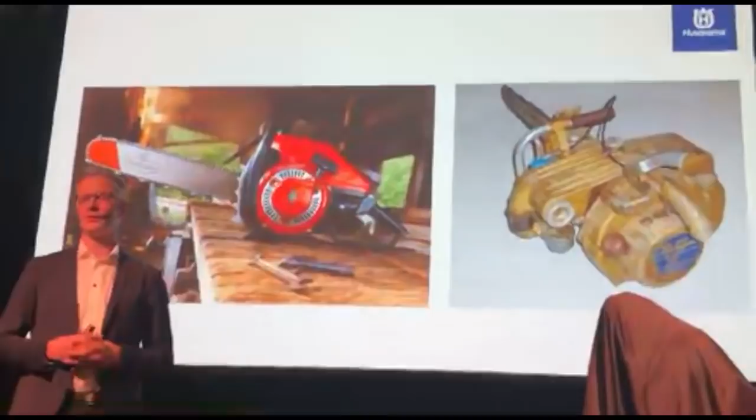60 years of chainsaws and innovation leadership we mentioned, and of course it started here. 1959, we saw this, what's called a Husqvarna 90 model. It was really a bit of a skunk works, building on the two-stroke engine expertise we had in the company back then, but trying that in other applications. That in itself is something that has shaped Husqvarna over the years, to adapt and transform depending on trends and shifts in the industry, not only our industry at that time, but other industries as well, like robotic mowers. Comparing to what was mainly available in the market for the professional user, this was a true innovation, user-friendly chainsaw that you could actually carry in a good way by yourself. So that was the first start.

Moving ahead 10 years to 1969, this is the Husqvarna 180. The main benefit with this was addressing something our users had suffered from: vibrations and white fingers. What we introduced here was the two-mass principle, where we separated the handles from the actual engine piece, the vibrating part of the product, meaning the vibrations when you hold the product are reduced by a big magnitude. So that really improved the working climate and environment for our customers.

Next step, another 10 years. We're moving into... this is the Husqvarna 162, where we introduced electronic ignition systems. Those were mechanical before, but we also introduced inertia-initiated chain brakes, which was a safety feature because it's a dangerous tool, we all know that. So we worked quite a lot with safety features in the past, and going forward we will continue to do that. The chain brake, an instant stop when something happens or you get a kickback, is truly important.

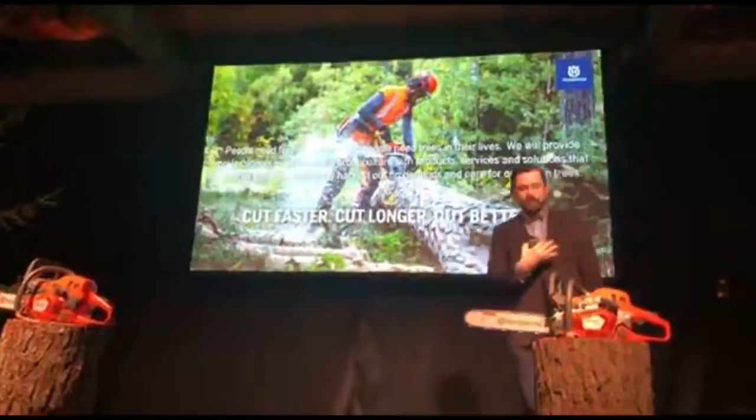This is my own personal team forestry statement. Our forestry group inside Husqvarna have this as kind of the mantra that we live by. People need forest products and people need trees in their lives. We will provide professionals in forestry and arboriculture with products, services, and solutions that enable them to responsibly harvest our timberlands and care for our urban trees.

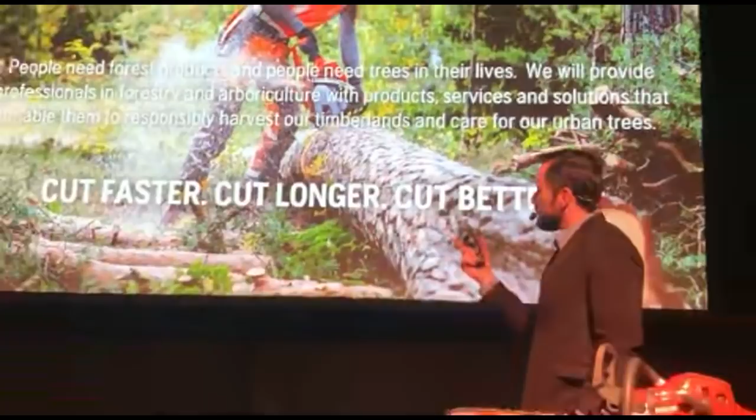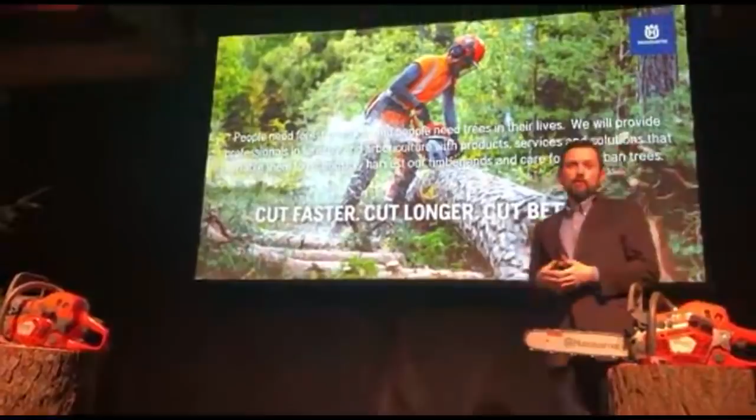So therefore, we will give our customers what they need to cut faster. We will develop products that will make them more productive, put more money in their pockets. They will cut faster. We will give them the ability to cut longer. We will enhance our durability any way we can to make sure that they can rely on our products. Our products are durable. Our customers can rely on us. And our customers will cut better. We will have products that will give them the height of efficiency.

We understand what their needs are, that these saws will be used not only for felling trees, but for bucking and limbing and trimming and pruning and climbing and groundwork. They have to be able to operate in all kinds of conditions. And so we'll talk about that in a moment too. But this is what we live by at Husqvarna Forestry. And I'm proud of my team, and I'm proud of what we have developed here for you today.

But when we're actually developing and getting into the what now of everything, we have to also dive a little deeper into what are the specific needs of those customers, the urban forester, the harvest forester, and even the landowner. The landowner is another important part. This is the farmer, the timber harvester, the timber landowner, the person that's investing in the property, that's maintaining a forest for 30 to 80 years, depending on what part of the world they're in. They're important too. So what are their specific needs?

And as we travel around and we meet these customers and we work side by side with them, what we've understood is that there's really three sides of this. There's the endurance side. Those customers have to endure. They have to endure some pretty tough environments, and their products are expected to do the same thing. So on the chainsaw side, we have to be durable. That's the baseline. That's why it's the bottom of my triangle there. That's the foundation. We have to be durable.

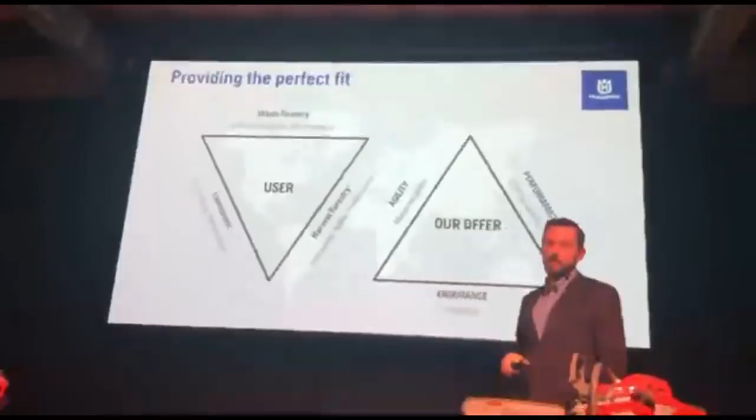We have to be agile, and that means that we have to be the best when it comes to maneuverability. When it comes to being able to limb, to buck, to climb, to work on the ground, that saw has to be very maneuverable. And then there's performance. This is just about getting the job done as fast as possible, putting money in the professional's pocket, or getting them back home to their families earlier. Whatever drives them, drives us. But performance is key to our operators.

So if we put all that together, durable product for endurance, high maneuverable product for agility, and high performance product. And how we're going to quantify that, we're going to talk a lot about this, is cutting capacity. That's our measure. That's the standard that we will measure ourselves by to make sure that we are giving our customers what they need. And we're going to talk more about that in a moment.

We get out with the customers, and we also understand that it's not just another tool. These chainsaws that you see here are not just another hammer. I know people that name their chainsaws. I don't know anybody that has named their hammer. These are very close to the arborist, very close to the forestry worker. That's why we actually call them forestry experts internally. They are experts, and this is an extension of them. So it's got to be a precision piece of equipment they can rely on.

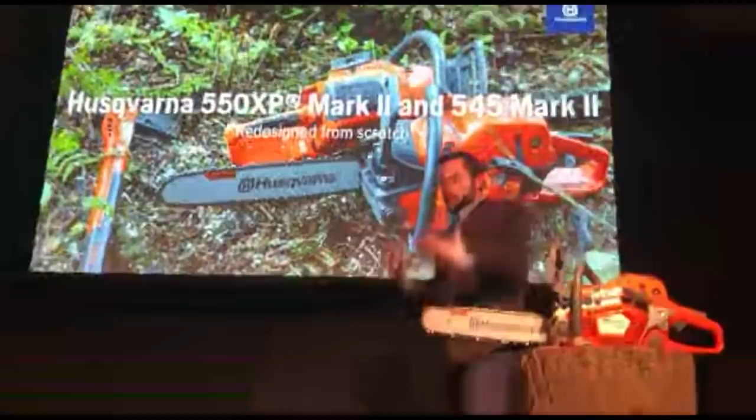So that's the basics of where we've come from, why we've done what we've done, and we're going to dig a little deeper into this. The 545, it's the baseline product. It's for the customer that is looking for a little bit better value side, is comfortable with performance that is on par with what the industry standards are. That's the 545.

But if you want to take a step up, if you want to go further than what the industry has typically offered, if you want the highest levels of performance in the industry, if you want the best-in-class cutting capacity, period, the 550 XP Mark II is a chainsaw for you. That's the difference in these. That's what we set out to do, and that's what we've done.

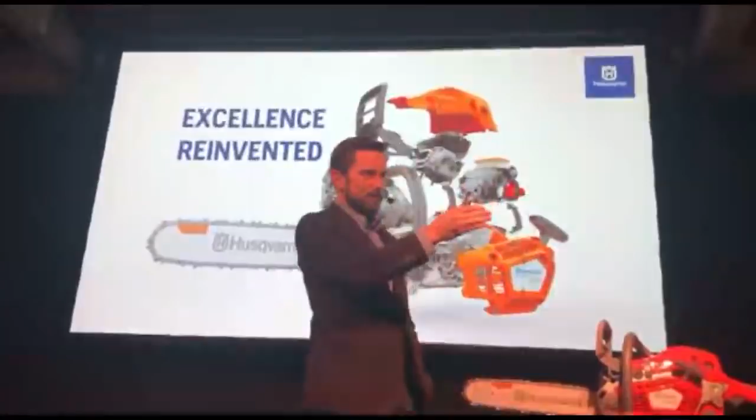This is a ground-up redesign. We are an excellent company, we have excellent products, but this is excellence reinvented. This is from the bottom to the top, left to right, a new product. And to tell us more about that, because I'm just kind of the dreamer of all of this, the actual doer is this guy over here. This is Anders Persmeen, and he's going to take you through what we've done in a better way. Anders.

Of course, I haven't done this design by myself. I have a great team behind me. However, my role within this project has been to lead the technical development and engineering of these Mark II models. I will hereby go through some of the improvements that we have made on the Mark II compared to the previous iteration. The focus areas we have had from the technical point of view are the endurance, the performance, and the maneuverability.

So we mentioned a lot before about the whys and the triangle: the endurance, the durability, the agility, the maneuverability, the performance, and cutting capacity. But if we're going to start with endurance, just to dig in a little deeper, we've done a lot of work with our harvest foresters, our production foresters. From 3 o'clock in the morning when a lot of them get up to go to work every day, with their families relying on them to produce, every board foot, as we would say in the U.S., every meter of wood that's cut is money in their pockets. So these people that do this hard work expect a saw to keep up with them.

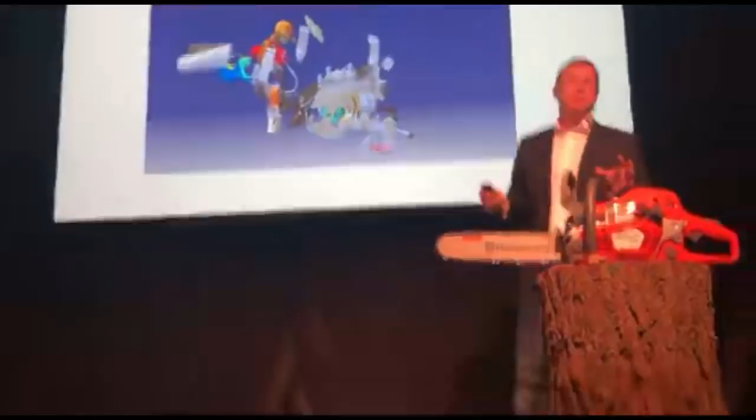For Mark II, all vital parts are new. In order to get the great endurance, performance, and maneuverability, we decided to redesign the Mark II from scratch. Of course, we have used some standard components and fastening elements that we share with other platforms. What you see here on the screen are the components that we have reused from the previous model.

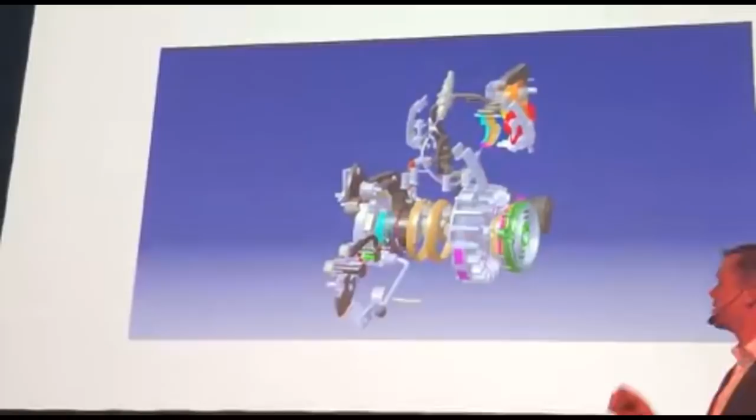We started to design the Mark II in the center of the product. We have a new crankshaft, a new oil pump. The clutch cover and parts of that are also new. We have, of course, the new piston, the cylinder. We also have a complete new intake system.

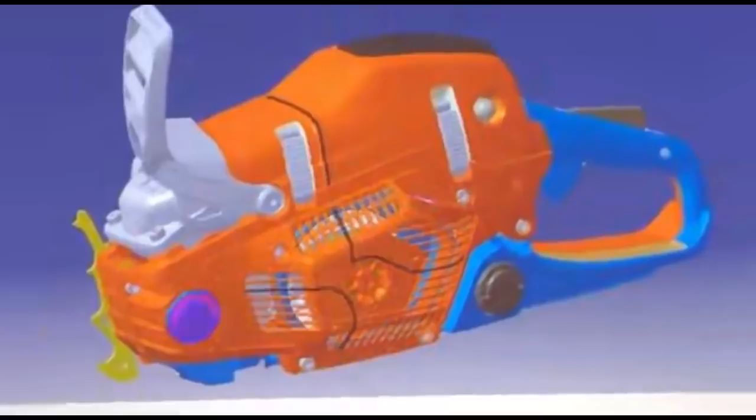The crankcase and the fuel tanks are also new, and of course the muffler. Surrounding parts around the engine have also been redesigned. And of course we have worked with the starter housing to get even better cooling performance. So this is just one way to demonstrate that these 2 models are designed from scratch.

What you see here to the right is the airflow that goes through the product. This airflow is important for cooling the engine, but it's also important for the engine function, the performance of the engine. Particles that come into the engine will cause wear on engine components, and this wear can result in reduced power output. It can also result in reduced life of the piston, the cylinder, and the bearings. In worst case, it can lead to seizures.

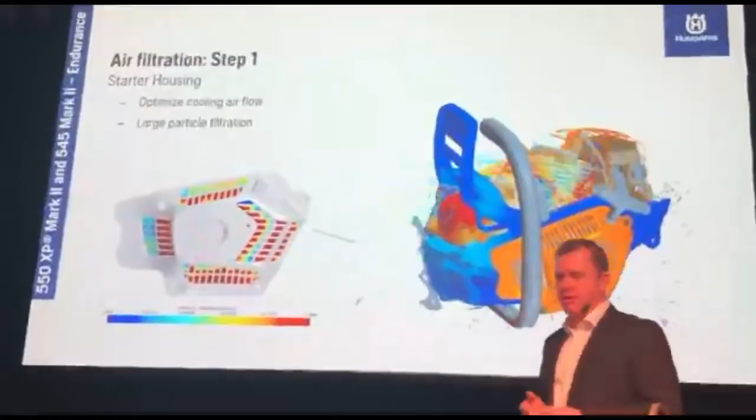What we have done here is to improve this. When it comes to air filtration, in my point of view, it's not just an air filter. Air filtration is much more complex than that. For Mark II, we have improved the air filtration in 3 steps. The first step starts with the large particles, the big wooden chips.

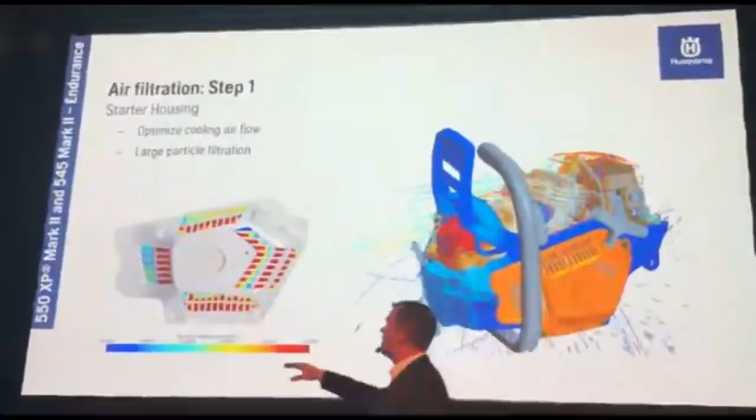We have redesigned the starter housing and the openings of this starter housing. We have two benefits of this. We have increased the total cooling airflow, but we have also been able to manage the wooden chips so they do not come into the starter housing too much.

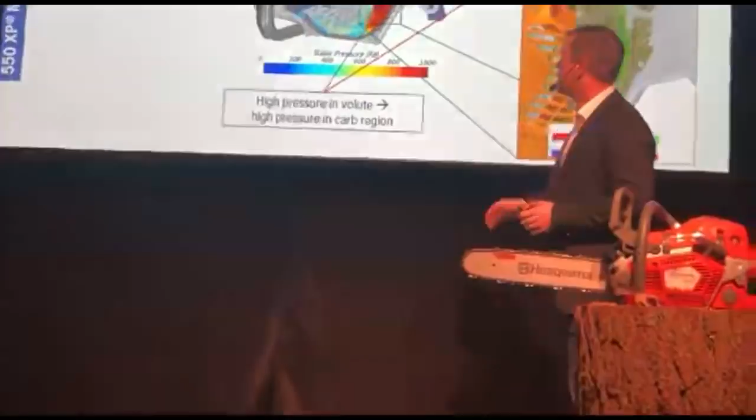The second step of air filtration handles medium and small particles. This is done via the air injection system. We have reworked the fan and the air nozzle in order to improve the centrifugal purification of air that will be led into the filter area. We have also been able to increase the pressure in the volute.

Higher pressure in the volute will result in a higher pressure in the carburetor region. Higher pressure in the carburetor region will result in less dirt for the air filter to filter.

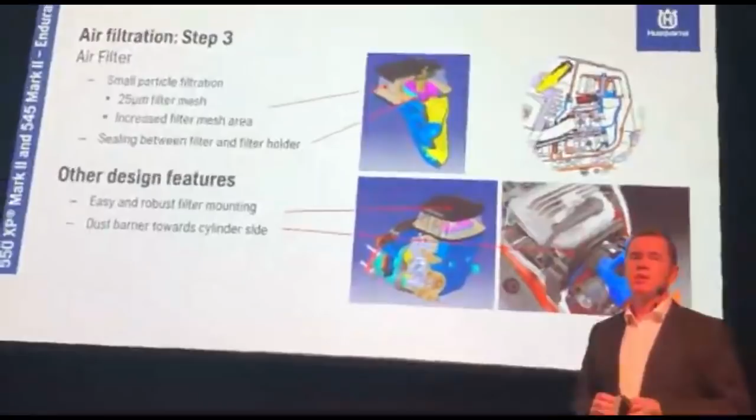The third step in air filtration handles the very small particles. In this case, we have a completely new air filter system. The filter mesh consists of 25 micron openings. These are very, very small openings. To compensate for this, we have been able to increase the total filter area.

We have also integrated a rubber sealing between the filter and the filter holder. This will make sure that the air for the engine must go through the air filter mesh and not take any shortcuts that will result in particles damaging the engine components.

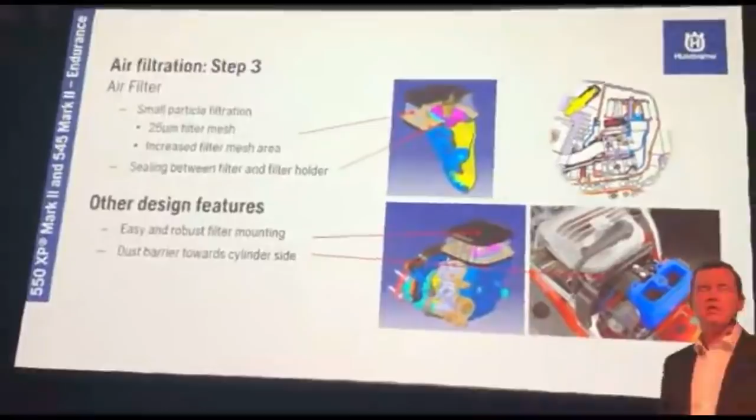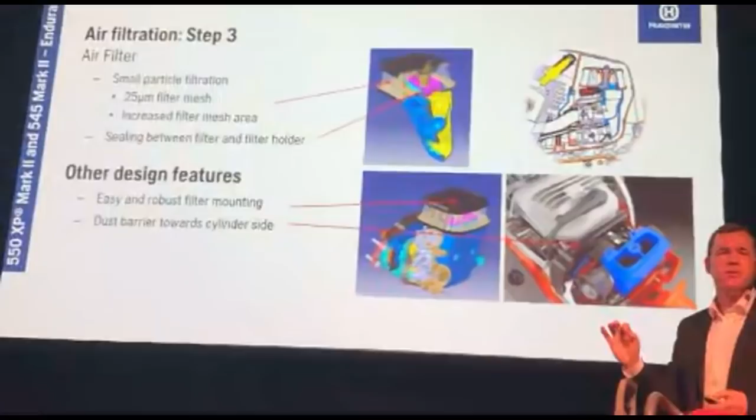We also have other features. We have an easy and robust filter mounting. We have also implemented a dust barrier. On the cylinder side, you will have a high pressure and high airflow containing dust and dirt. And that's not something we would like to have in the filter area. This dust barrier is very well supported by the cylinder cover, making sure it's sealed.

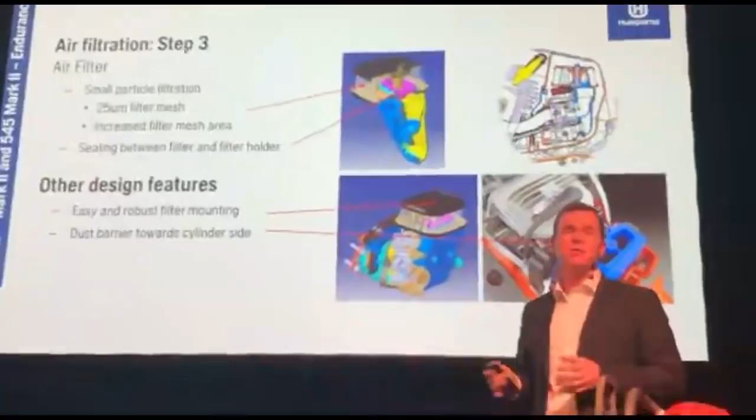By having all these three improvements of air filtration, we've been able to increase the time before you need to clean or replace the air filter. And we also improved the resistance of these Mark II engines to getting dirt into them, causing these failures I mentioned earlier.

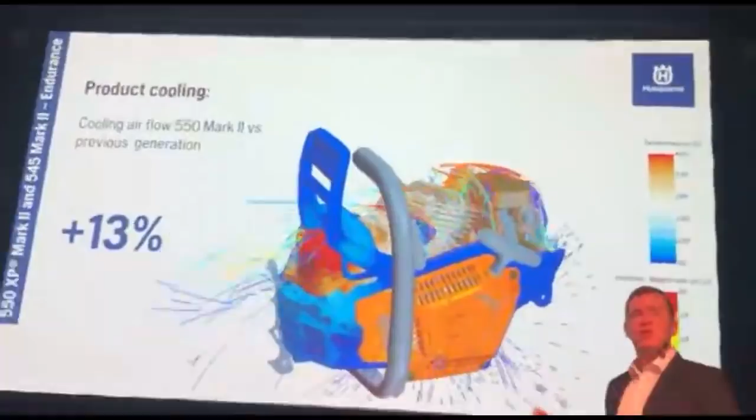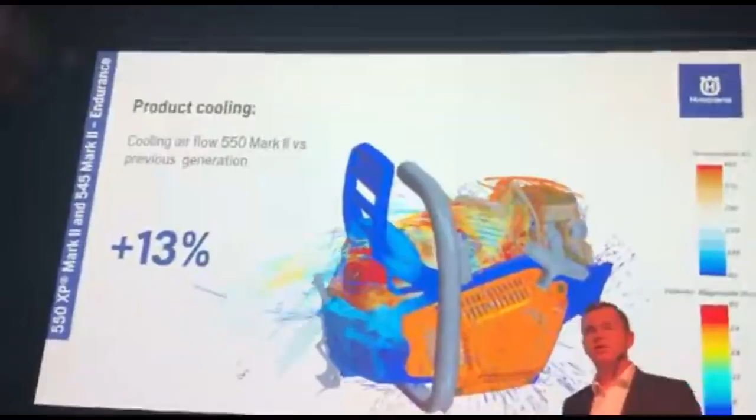When we talked about the redesign of the starter housing, how important that was for the cooling, we've increased the total cooling airflow by 13%. This will reduce the temperature of the engine, but also the product. So why is that important? Reduced temperature will make the product more durable. It will also increase the starting performance and runnability of the chainsaw.

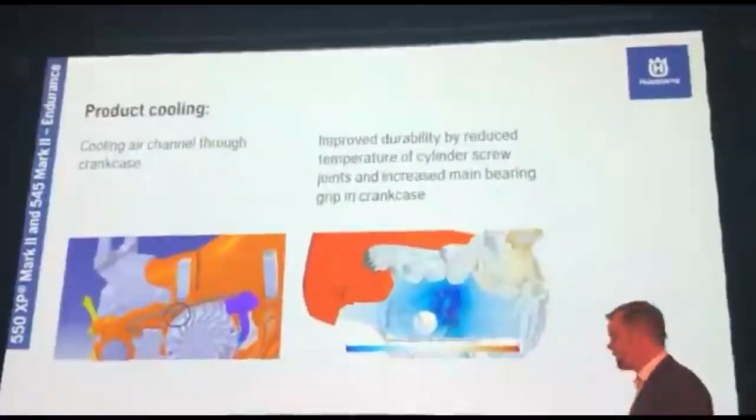One example of how we have utilized some of the increased airflow is to transfer some of this airflow through a channel in the crankcase to the clutch side of the crankcase. By doing this, we've been able to reduce the temperatures in the crankcase and thereby also improve the screw joints between the cylinder and the crankcase. Also, the main bearing and the installation of the main bearing have benefited from this.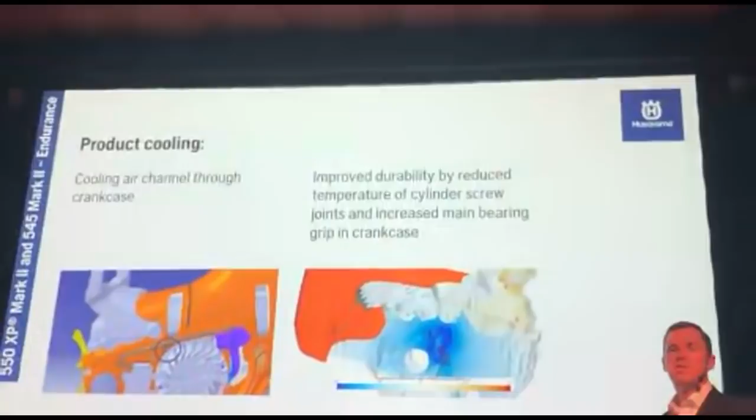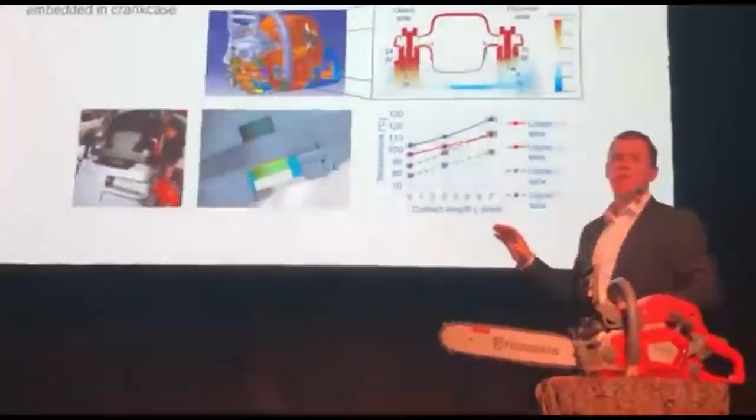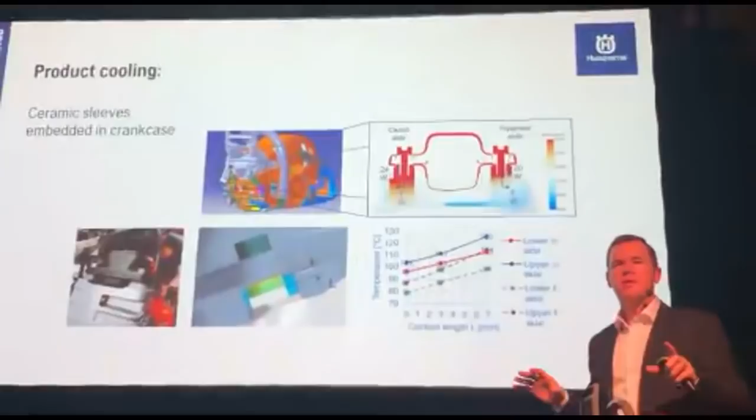Another example of how we have been working with product temperatures is the ceramic sleeve, placed between the muffler and the crankcase. We know that the muffler is very hot, and most of the heat transfer goes through the contact area between the muffler and the crankcase, not through the screw. This ceramic sleeve has very good insulation, and through theoretical models we have been able to design this interface so that we are at a thermal level we consider proper for a real good screw joint.

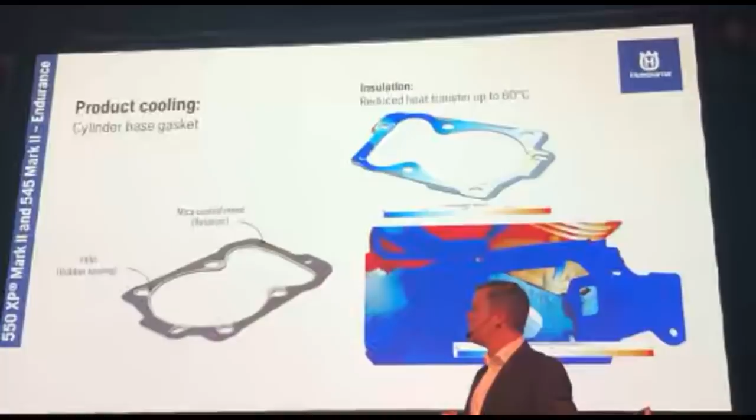We have also redesigned the cylinder-base gasket, all to reduce the heat transfer from the cylinder to the crankcase. We have added mica, a silicate mineral with very good insulation, and by doing that we have reduced the heat in the crankcase by up to 60 degrees.

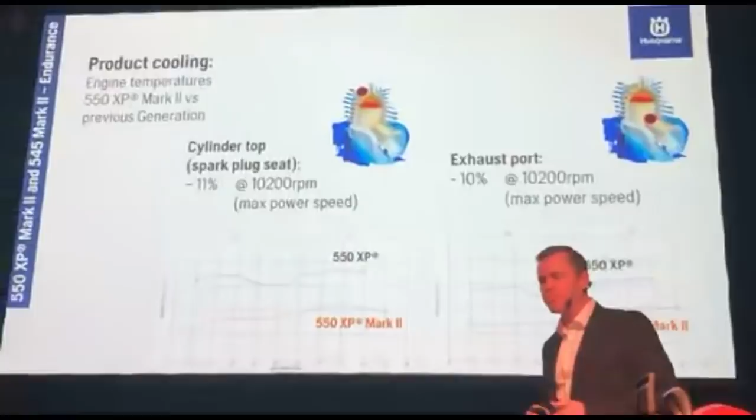In Mark II, even though we have increased the power output, we decided we wanted to reduce the thermal level of the engine, the thermal load of the engine. In this case, we have reduced the cylinder temperatures at rated speed by about 10%. This will reduce the stress level of the engine components, and it will also give you thermal margins for overheating.

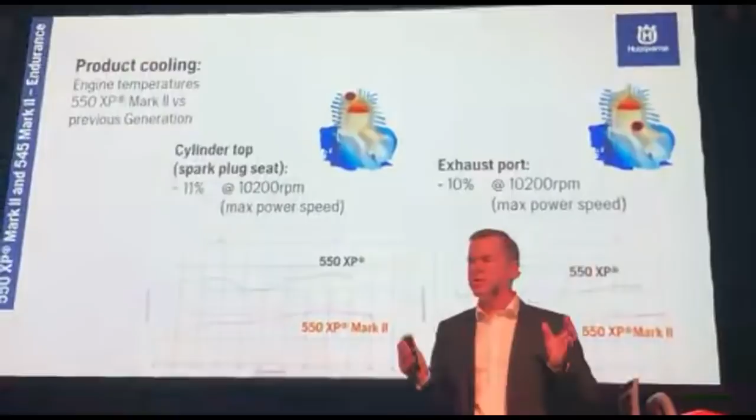So, all in all, when it comes to product cooling, I would say that the Mark II models have very good margins for operating in tough and hot environments.

Endurance is not all about product cooling. Endurance is also about adding stronger and better material in areas where we have high loads and tensions. For the handlebar, we decided that we wanted to have all force-loaded parts in metal, including the spring holder. This is a difference compared to the previous model.

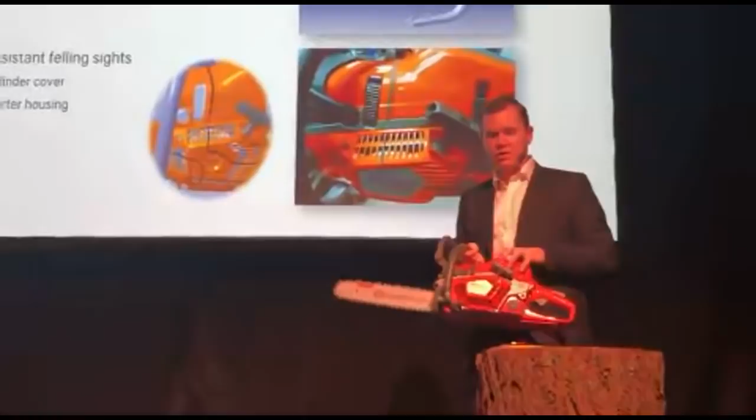When it comes to the felling sights, we decided that the cylinder cover and the starter housing should be dual injection molded. This will guarantee long-lasting wear resistance when using the product. You may see these as small changes on Mark II models, but when it comes to long-term durability, these improvements are huge.

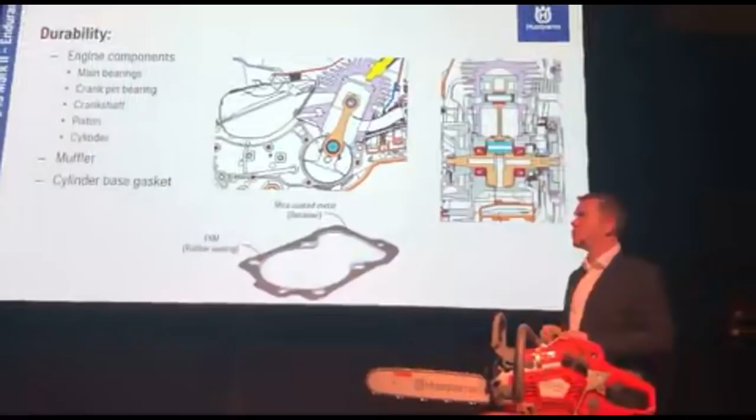We have also redesigned other components in this product for increased durability. The main bearings have a more solid installation in the crankcase. We have a new, stronger crank pin bearing that stands higher loads. The crankshaft, connecting rod, piston, and cylinder are also reinforced for increased durability and performance over a long time.

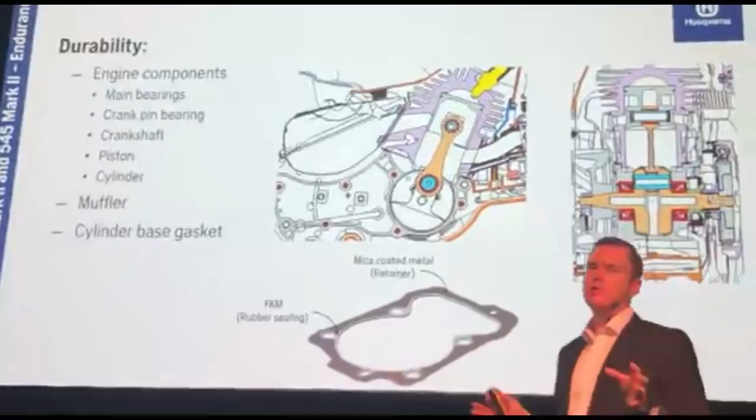The muffler has a larger volume compared to the previous model. This larger volume will make the engine breathe in a better way. This will give us higher power output, but it will also reduce the thermal load of the engine.

The cylinder-base gasket, as mentioned earlier, has this mica coating. We have also integrated a rubber sealing in this cylinder-base gasket. This will ensure there is no leakage between the cylinder and the crankcase. This is very good for durability, but also for starting performance and runnability.

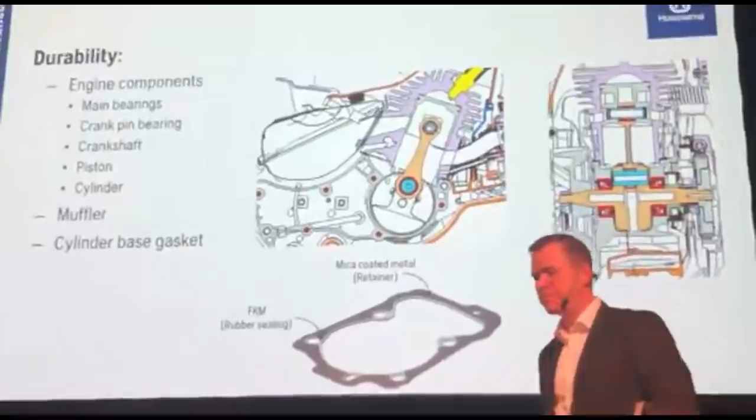When it comes to startability, the Mark II has been improved by the following steps. The reduced temperatures of the product will give us better control of the air fuel mixture in the crankcase.

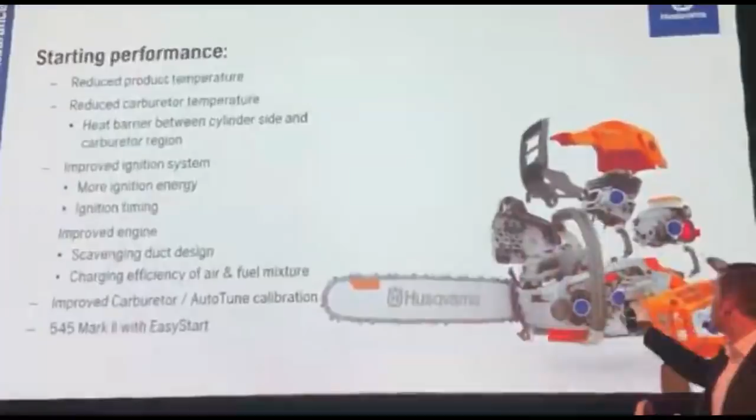The heat barrier between the cylinder and the carburetor will make sure you're reducing the temperature of the carburetor. This is extremely important, especially in hot environments. The reduced temperature will also reduce the risk of the fuel vaporizing earlier than it should.

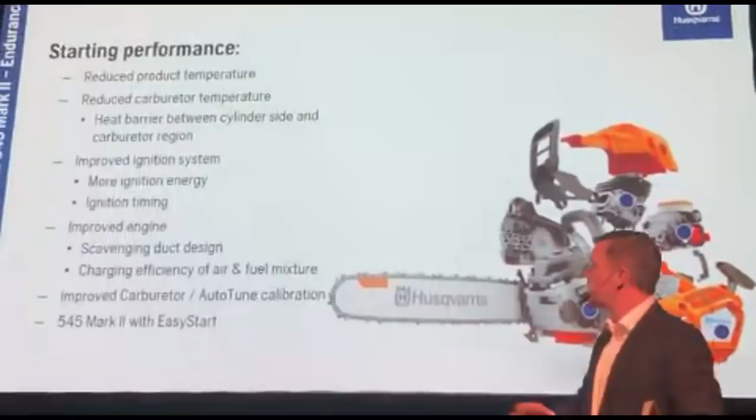We also have a complete new ignition system with more energy. More energy will give us a spark that burns for a longer time. This is important when you want to ignite the air fuel mixture in the combustion chamber during the starting sequence.

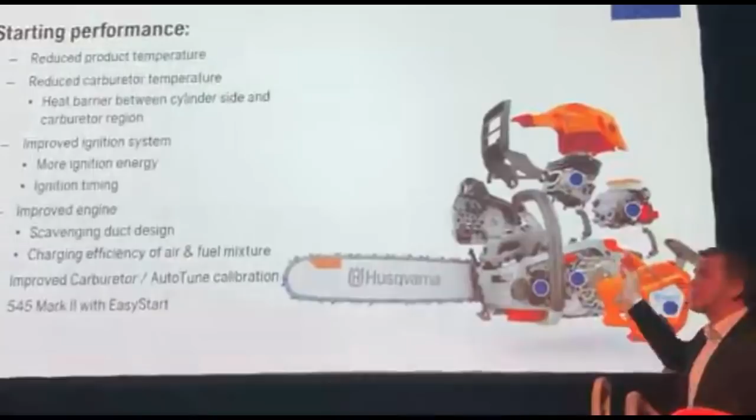We have also improved the cylinder. The design of the scavenging ducts will give us higher charging efficiency of the air and fuel mixture. We also have new carburetors, and the AutoTune has been updated to give us the best performance when it comes to startability.

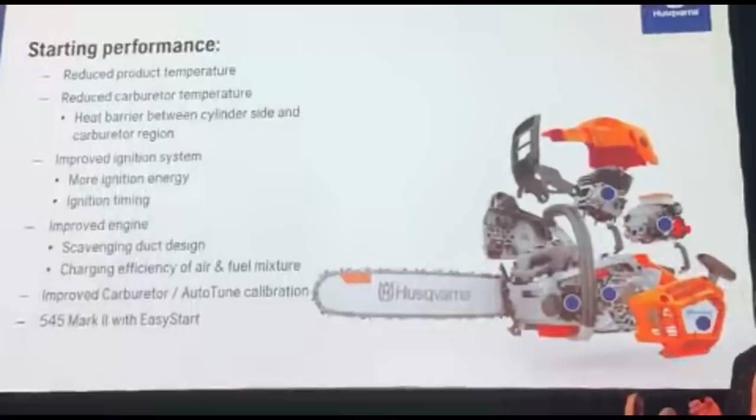For the 545 Mark II, we also equipped this product with an EasyStart. This is a recoil device that will smoothen out the pull when you're doing the starting operation.

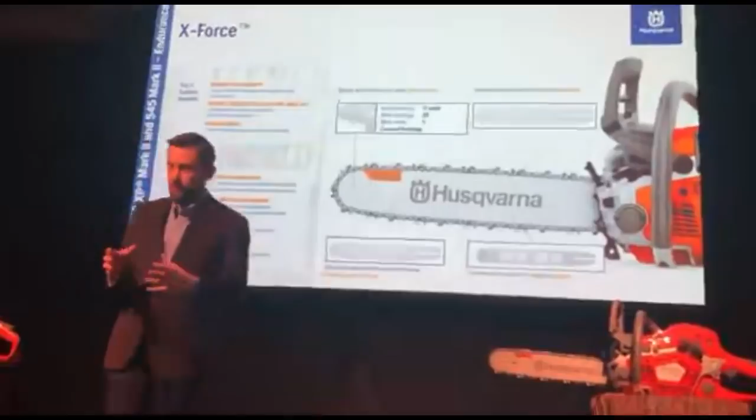I guess the entire system is important to talk about as well. We have, of course, worked many hours to make sure that the power head, the engine itself, is designed to be as reliable and durable as possible. But the system, what the customer really cares about, is making sure the entire product does its job. The power head, the chainsaw itself, the bar, the chain, all has to work together.

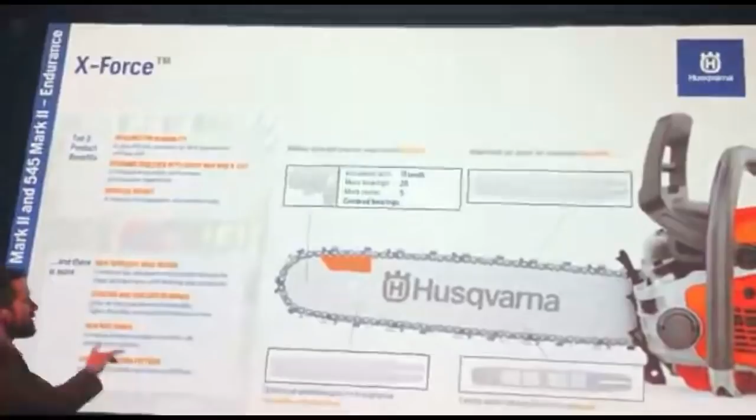This bar has actually been designed together with our chainsaws for the intended applications that they're intended for. So the durability has to be increased across the system. And you'll see here some of the points that we've focused on.

When it comes to the bar itself and the sprocket area, we have an increased size sprocket, an 11-tooth sprocket. More bearings have been added as well, and those bearings are protected and covered in a better way than previously. The rivets that hold the system together, we've increased to 5 rivets, which gives much more holding strength and is much more durable for the applications, especially when you get into bucking and limbing exercises.

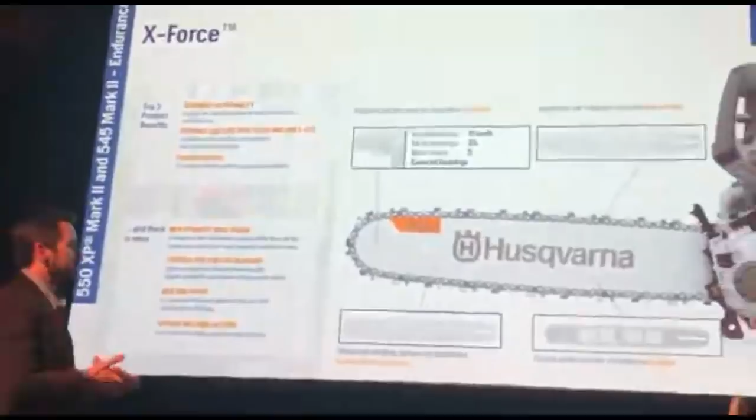The shape itself has been improved and optimized to carry the chain in a good way, and for the rails to hold the chain in a better way. The riveting pattern itself has been improved, not only for durability, but also for stiffness. This gets back to the limbing application, for the high-speed limbing that is done, and the twisting that could take place even in the falling applications.

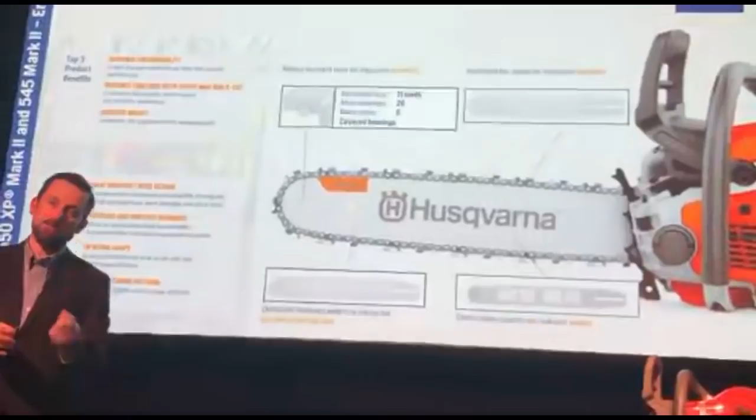But it's not just about the durability on the bar, the weight's been reduced as well. So we've taken all these measures to increase durability, but at the same time, we've actually reduced the weight. And the reduced weight on the bar does help with the maneuverability side.

So if we move to the next section, we'll actually talk a bit about maneuverability. This is something that, I think, looking into the industry, we're oftentimes not paying enough attention to, which is how the saw actually works with the operator.

It's not just about reducing weight, it's about the experienced weight, as you mentioned before, Andreas. It's about having the right gyroscopic effects, the right balances, the right center of gravity. Because the limbing, the bucking, and the falling all have to work with the operator to meet maximum efficiency and productivity. So I could keep explaining this, or I could actually show you a brief clip about what maneuverability really is about for the operator.

But there's a lot of things you've done here to improve this and keep it more or less a core part of Husqvarna's DNA alive while taking the next steps. As Jen said, maneuverability is a really big part of the Husqvarna DNA, and it has also been highly appreciated on previous models. With that in mind, we kept the same expectations and standards when it comes to Mark II.

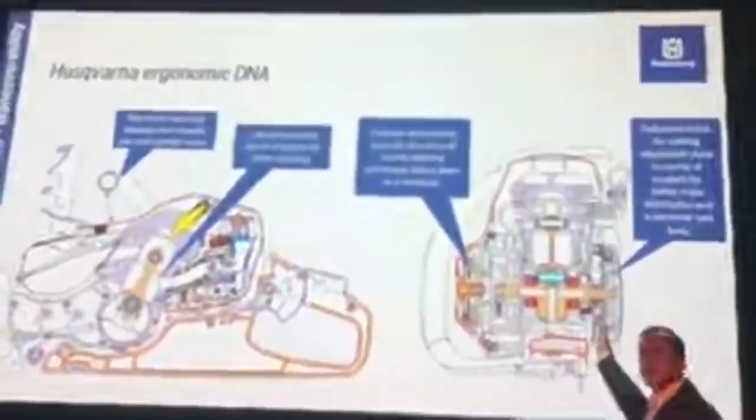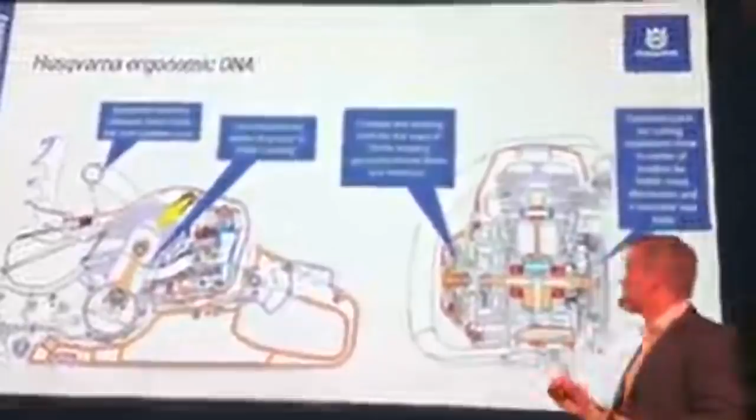The inboard clutch design will make a closer position of the guide bar and the chain to the center of the product. It will distribute the mass in a better way, but it will also keep the chainsaw body more narrow. We have the small flywheel, which is the same as from the previous generation. This will keep the gyroscopic forces to a minimum, and it will also result in less resistance when you're moving the chainsaw around.

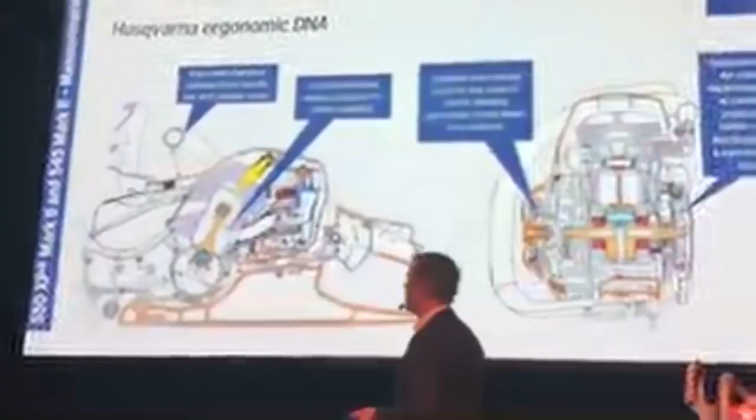We also kept the tilted design of the engine. This will keep the product as compact as possible, and you will also have the center of gravity very low. Another thing that was requested on Mark II was to increase the distance between the front handlebar and the cylinder cover, due to improved maneuverability. In some cases it seems to be too tight, especially in winter time or limbing with thicker winter gloves.

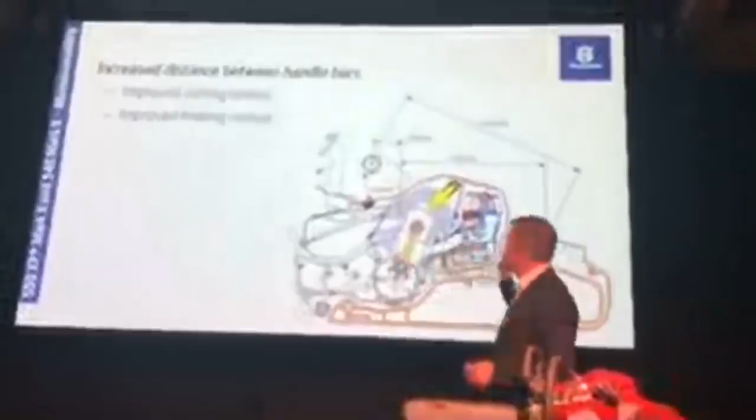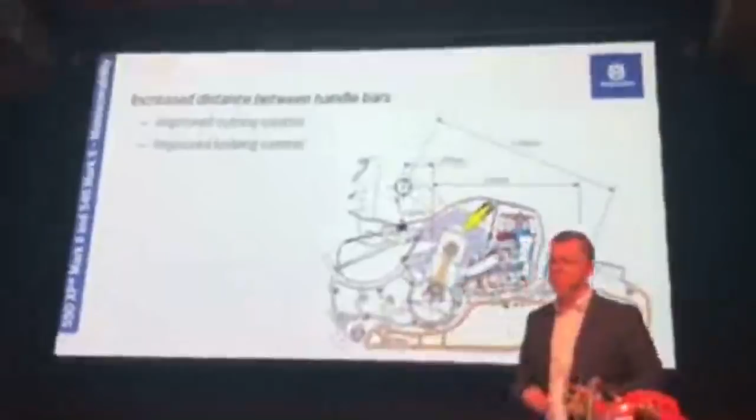So what have we done to improve the cutting control and the limbing control? We've increased the distance between the front handlebar and the rear handle by 10 millimeters. This will give you more stability and control during the cutting operation. As I mentioned, we increased the distance between the cylinder cover and the front handlebar, but we also moved it 5 millimeters forward. That will improve the limbing control. We have made all these changes with a mindset to provide excellent maneuverability with the chainsaw.

We've taken some big steps when it comes to endurance and some big steps when it comes to maneuverability. But we've also taken a really big step when it comes to performance in getting the job done.

I have these cylinders that sit on my desk, and this is actually what 1 second of cutting looks like with the 550 Mark II and with another saw on the market.

When you look at this 1 second, it's a good representation of what you're gaining in performance. This is what best-in-class cutting capacity looks like. But it may be a little hard for you to see.

So this is 1 second of cutting, and we went ahead and scaled it up for you. So this is 1 minute of cutting of best-in-class cutting capacity.

So now you take this and you say, what does a day look like? What does a week, a month, a year look like in best-in-class cutting capacity? What does it really mean? It means more money in your pocket or getting the job done in a faster, more efficient way.

That's what cutting capacity is. That's what performance is. And I know this has been a huge part of your team's work, so again, I'll turn it over to you.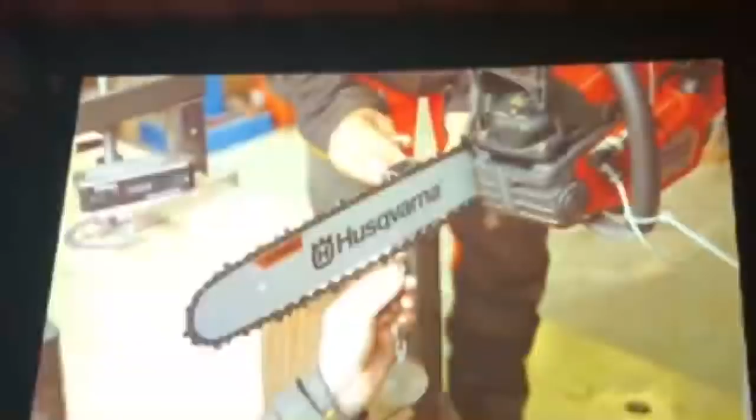Traditionally when it comes to chainsaws, performance has been defined as power and weight. However, with Husqvarna, we believe that performance isn't just how much a product weighs or how much power it has. It is how productive it makes our users.

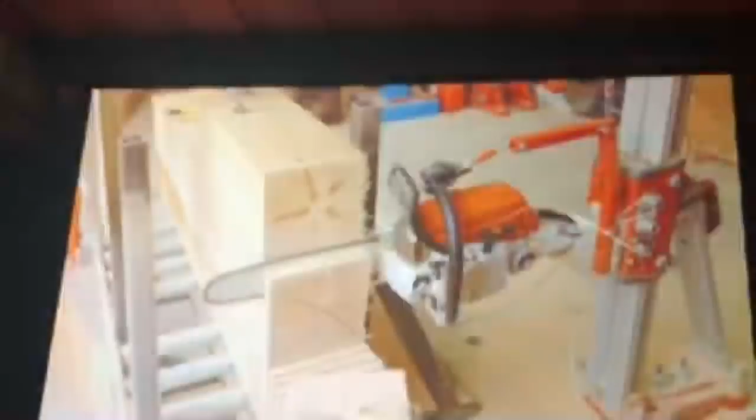So that's why we came up with a new test that we call cutting capacity. That is a measurement of how well a chainsaw performs its intended task. So what we do is we measure the time it takes to cut through a log with a certain cross-section area, and what you end up with is the result in square centimeters per second.

Cutting capacity is important because the more wood you can cut in less time, the more productive you are. And the more productive you are, that's more money in your pocket over time.

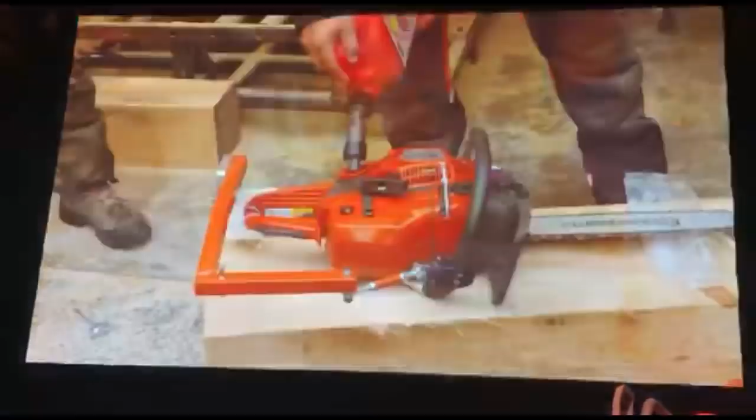We unpack our chainsaws on film. We show the serial numbers. The chainsaws never leave the frame during the entire test. And after the test, when we're done, we're saving the chainsaws as they are, not touched afterwards.

That includes cutting equipment. So if anyone wants to come and look at the chainsaws we used, they are available here at Husqvarna.

So now we're back a couple of months later. The test rig is silent and the testing is finally done. And we're very happy to say that we were able to prove what we've always thought, that our product has the best-in-class cutting capacity.

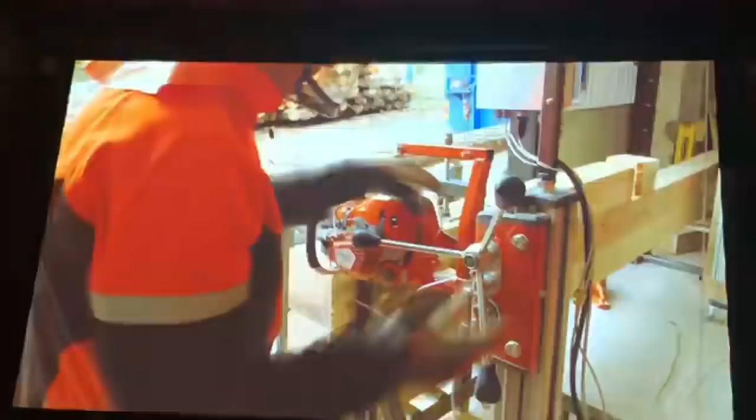And what that means is that we can with confidence say that any customer of ours, whether it's a single operator with one chainsaw or an entire company with a fleet of chainsaws...

...is that when they use the 550 XP Mark II, they are going to have the highest productivity in the market today.

Okay, so what have we done more with these Mark II chainsaws? The Mark II chainsaw still has the same 50cc stroke volume as the previous models.

But due to redesign of the engine layout, the reduced restrictions in the inlet system, the larger volume of the muffler, and the updated carburetor and auto tune, we have been able to increase the power output for both 545 and 550 Mark II.

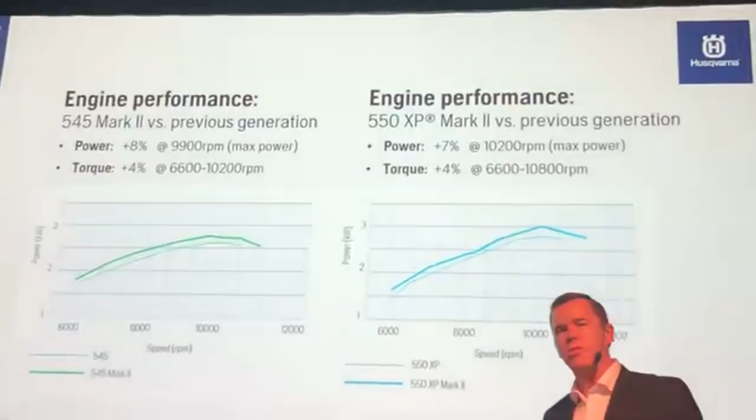This power and increased torque are also available in a wider range of RPM. And this is one of the key contributors for the increased cutting capacity.

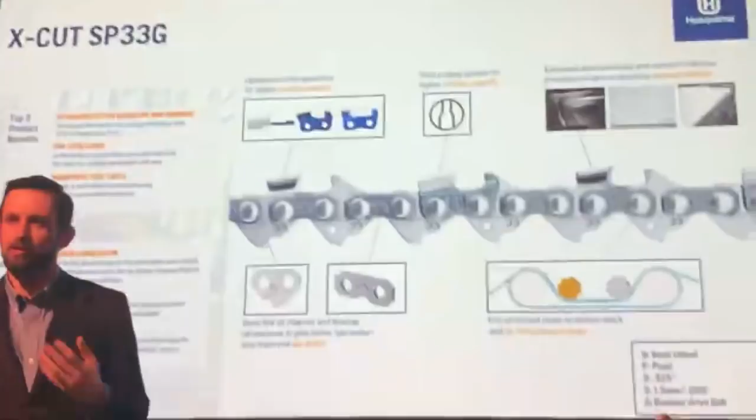But the chain is, of course, a major part of it. Just like we mentioned before, with the bar being so important for durability and maneuverability, the chain is a key component in the total system that gets the cutting capacity results that we test for and prove.

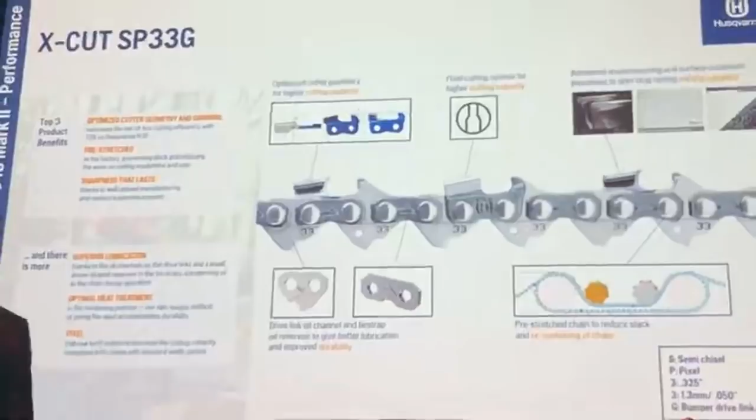So a number of things go into it, but again, like we mentioned before, the design of our chain is now linked closely with the design of the chainsaw and the bar. We look at the applications needed, we look at the chainsaw design...

...and we come up with the right elements in the design of the chain to make it the most productive chain we can possibly make for the saw. The chain cutter tooth has five key points that we need to make sure we optimize.

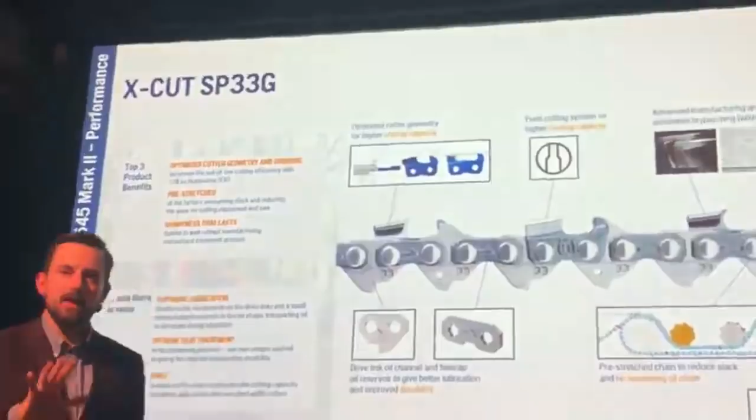The team spent a lot of time in those 5 key spaces, making sure that we can clear chips in a good way, that we can separate the fibers in a good way, and again matching it to the power output, the torque, and the speed of the engine that is driving it.

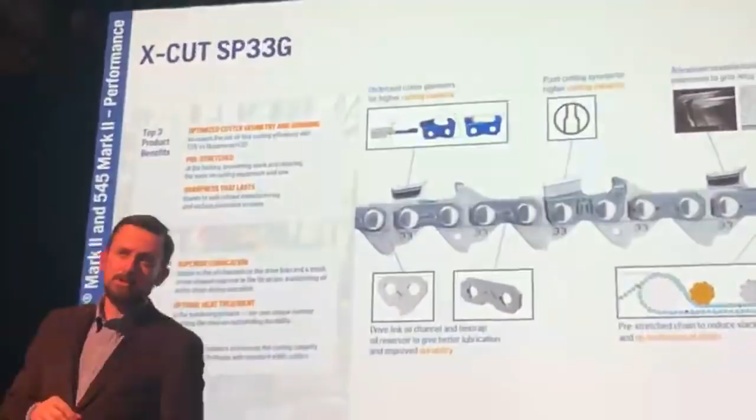The chain itself is, in this particular instance, a narrow kerf chain, which is the ideal chain for the 50cc when it comes to getting the cuts done quickly and efficiently, matching it again to the power output of the engine itself. There is a durability element to our new chain.

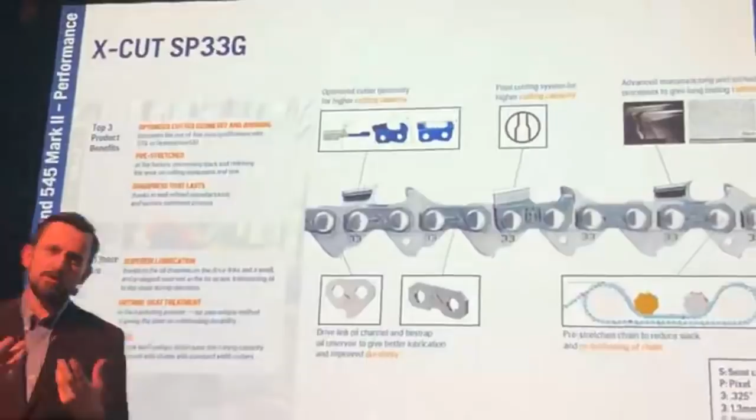The X-Cut chain that we produce has oil grooves built into the drive links to make sure that oil gets spread through the rivets and around the chain in a good way, helping it not only from a durability standpoint, but also being lubricated in a good way for performance.

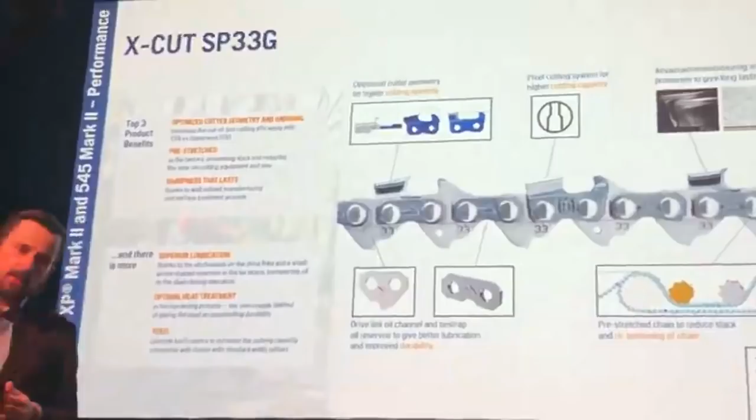And then, keeping the operator in a high performance state, we also pre-stretch the chain. This pre-stretching of the chain in the manufacturing process makes sure that our customers aren't having to continuously tighten the chain on the bar, which takes them down and basically takes away the uptime that they have for their application.

So chain, bar, and power head all come together in these 3 elements of endurance, maneuverability, agility, and performance.

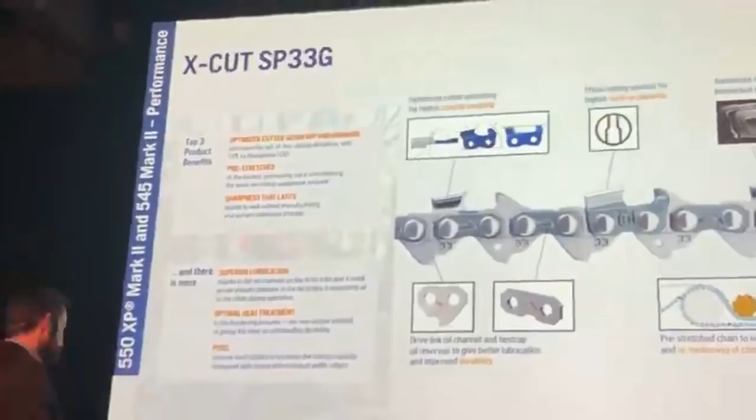Okay, so even though power is very important when you want to cut wood in an efficient way, we also think you should have that power when you need it. Therefore, we have also improved the acceleration of the engine.

This figure is 30% faster on the 550 Mark II versus the previous generation, and 25% faster for 545 Mark II versus the previous generation. This comes out of test.

We have run the chainsaw, including a 15-inch bar and chain, with an alkylate fuel at 20 degrees Celsius. We have measured the time from idling speed up to 13,200 RPM. With this improvement, you will have the power when you need it.

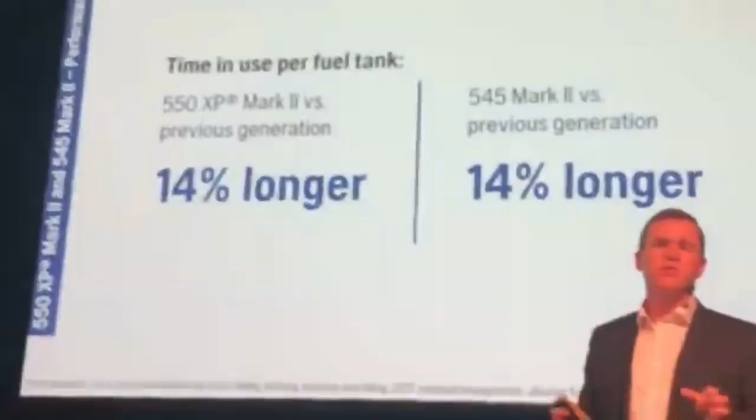There's also been a request from our users that they want an increased time in use before you refuel the chainsaw. Depending on how you're running the product, the fuel consumption will differ.

One way to describe that we have increased the time in use is running the chainsaw in a laboratory environment using a test cycle simulating real usage. This test cycle includes felling the tree, limbing the tree, bucking the tree, and idling when you're moving to the next tree to start the next felling operation.

This improvement has been done by two things. First of all, we have improved the fuel efficiency. For the Mark II, the fuel consumption in this test cycle is not higher, or it's at an equal level compared to the previous model. We have also made the fuel tank and oil tank a little bit larger.

So these are some of the improvements that we have made on Mark II compared to the previous generation. And of course, we have made other improvements that we'll talk about tomorrow.

Great. Thank you, Anders. Thank you also for a job well done. Yes.

So we introduced to you today two new chainsaws, the 545 Mark II and the 550 XP Mark II. And we talked about the applications and understanding the applications of timber harvesting and urban forestry. These are core products for us that support our customers and get the job done in a good and efficient way. Durability, maneuverability, and performance in everything that we do.